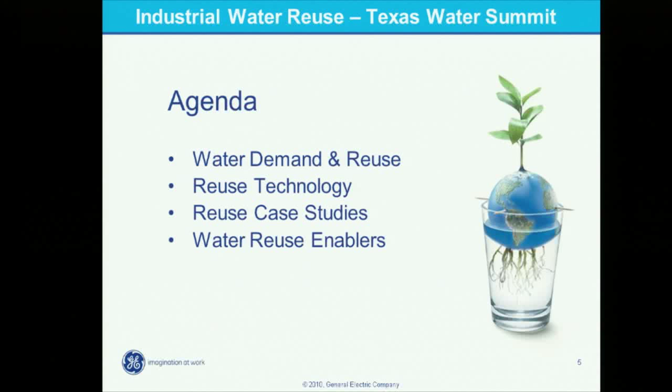So what I want to talk about today - I don't want to cover a lot of ground that's already been presented, but talk to you a little bit about industrial water reuse and what we've seen applied to date, and touch upon what we think the future holds and where some of our R&D dollars are going.

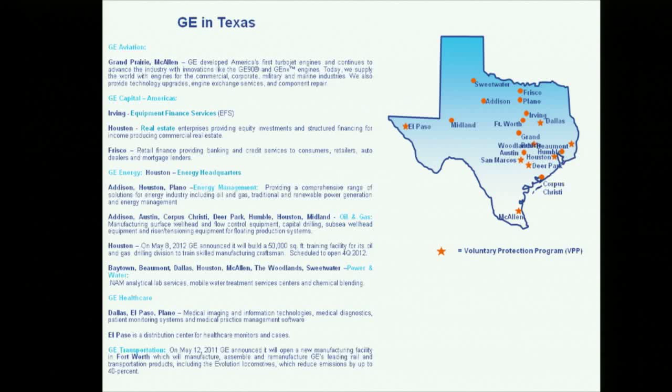Texas, we're here today because Todd and I and others really enjoy the field of water treatment. It allows us to apply fiscal and environmental stewardship in the work we do. We're also here because GE has a big vested interest in the state of Texas with over 9,500 employees, so we want to make this community sustainable for those fellow associates, whether it be healthcare, aviation, GE water, power, oil, and gas, as Dr. Freeman indicated earlier with our investment here. So we are committed to Texas.

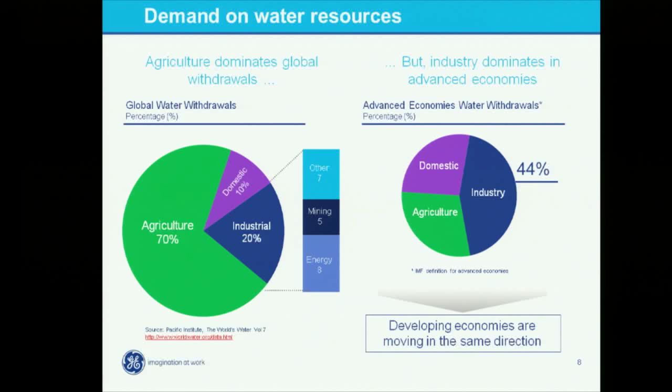In terms of industrial reuse, you've seen similar slides today, but I wanted you to understand that the use of industrial water around the world is nowhere near what it is here in North America, but it's growing. The vast majority of our advanced membrane systems on reuse water are overseas, especially in the oil and gas industry. This is important when we talk later about economics. You've seen this slide before, just a little different variation from the 2012 report.

But what is water reuse? Conventional technology, whether it be clarification, activated sludge, mixed liquor, aeration, treatment for organics, and conventional filtration, media filtration, would discharge directly to your river. But reuse looks to do several things. Number one, use advanced technology to recover some of those valuable resources. For instance, carbon can be an energy source, especially in food processing, where the biological oxygen demand levels are very, very high. You can capture that and produce gas through an anaerobic treatment process.

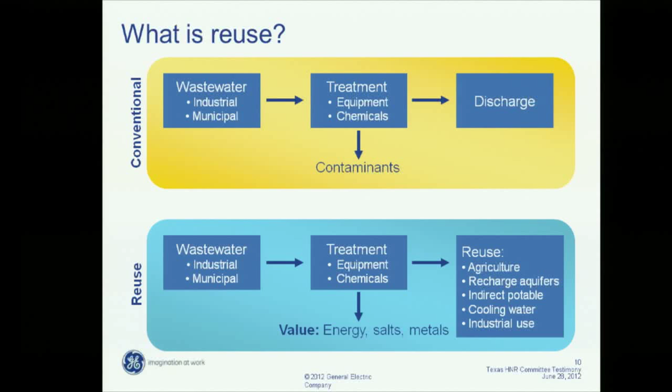As well as inorganic salts - my associate Todd touched on this earlier - can we convert those salts to a usable byproduct? And then reuse options: can you expand the number of reuse options beyond agriculture and recharge? Indirect potable use, and in some parts of the world, they're looking at direct potable reuse with advanced technologies.

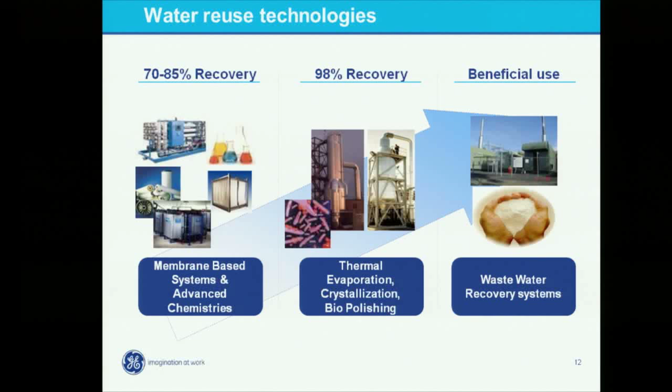So the technology itself - we touched on these topics today - whether it be a membrane-based system or a thermal-based system, just keep in mind that you have a concentrate stream you need to manage, whether it's deep well injection, evaporation pond, or thermal evaporation. But a lot of our research and development is in creating those salts, in creating membranes that are less susceptible to fouling, which includes the management of dissolved inorganics, as well as hot oil produced water that comes back, say, in the oil sands of Alberta. How do you recover that heat and maintain it? Is it with ceramic membranes, or more conventional membranes? And then the cost associated with these different technologies - they could be standalone technologies or a combination of processes.

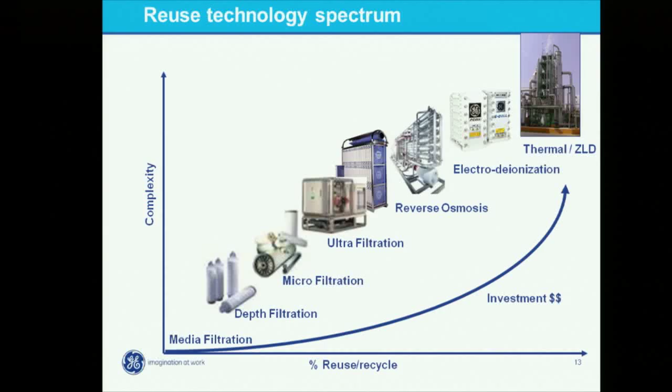Ultrafiltration could be used for direct filtration of surface waters for drinking water purposes. It could be used for tertiary filtration for wastewater, either for direct discharge, especially if you have a low nutrient discharge limit, or if you want to feed it to downstream desalination technologies. If you want to combine that with a membrane bioreactor, or as a membrane bioreactor, you can enhance the organic breakdown of solids and produce a pristine effluent, again for additional feed to downstream processes. Reverse osmosis, electrodeionization, thermal - they're all available technologies, but they come with certain CapEx and OpEx costs, and you have to look at the application to determine if it's justifiable compared to all your other alternatives. But the good news is we have a lot of data now. These advanced membrane systems have been on wastewater of multiple types for 10, 15 years, so we can help calculate CapEx, OpEx costs for comparison purposes to see if it's a viable alternative.

On the left-hand side, you see the more readily usable municipal wastewaters, and many industries use municipal wastewater because of its proximity to the source, its predictability, its availability, and its treatability. The Palo Verde Nuclear Power Plant just signed an extended agreement for municipal wastewater from the city of Phoenix because they wanted to assure an available water source.

I mentioned earlier, risk profiling, right? Can I maintain a sustainable business if I don't have secure water sources? So this is changing the value of water, municipal as well as industrial wastewater, but industrial comes with higher cost, more processes, more complexity, and the need for operator skill.

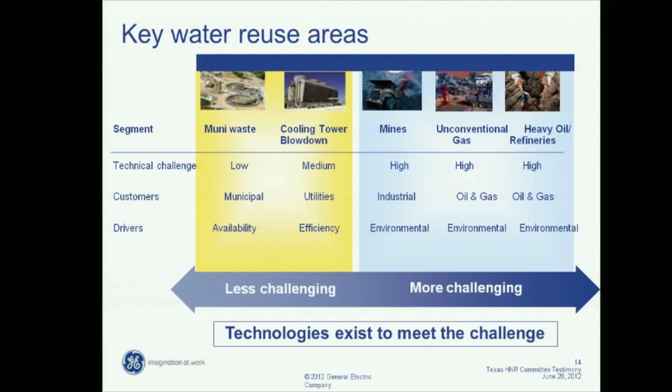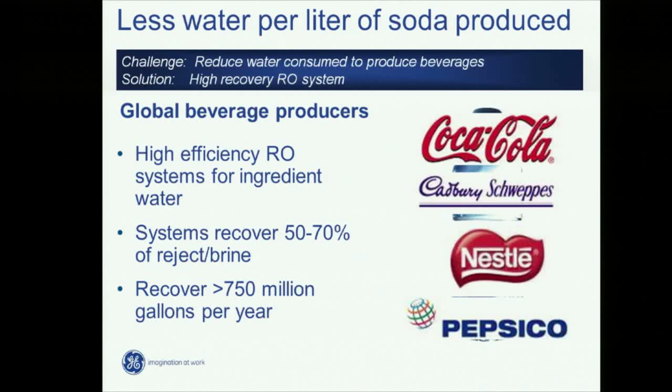Just some examples of cases. One industry leading this is our beverage and soda bottlers, water bottlers, such as Coca-Cola, PepsiCo, Nestle, Schweppes. They're trying to squeeze every ounce of water they can for a given product unit they're delivering.

They look at an entire process stream, RO. They'll put a concentrate RO on the first pass RO concentrate stream, and then take that water and treat it with a membrane bioreactor, feeding it for non-product uses like cooling towers, boilers, wash water, etc., to increase the recovery of their product. This is important as they develop bottling plants throughout the world.

Their approach is to go and look at the watershed, just as we should when planning regional water plants. You've got to look at the entire watershed to make sure you're not creating an adverse impact upstream into the water source as well as downstream in the discharge.

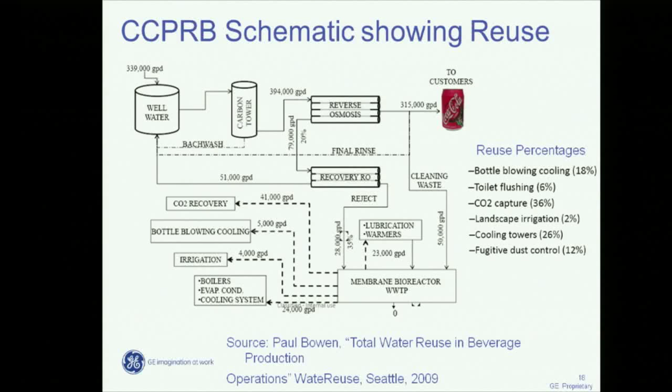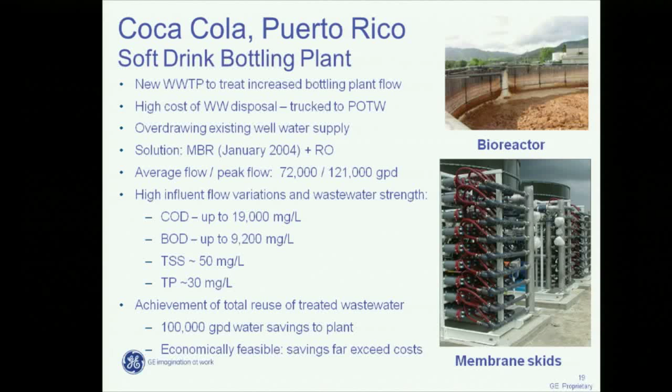They do this on the wastewater side too. This is a Coca-Cola plant in Puerto Rico. Notice the COD content, the biological content that can be converted to a renewable energy source and fired in a boiler or gas engine. And to give equal time, PepsiCo's Frito-Lay plant in Casa Grande is recovering over 80% of the water.

Oil and gas upstream, we touched on this earlier. Several speakers addressed this, but there are systems operating with NPDES permits to the upper Colorado River, and they've discharged over 5 million barrels since they started operation in 2006, again using multiple technologies to do that.

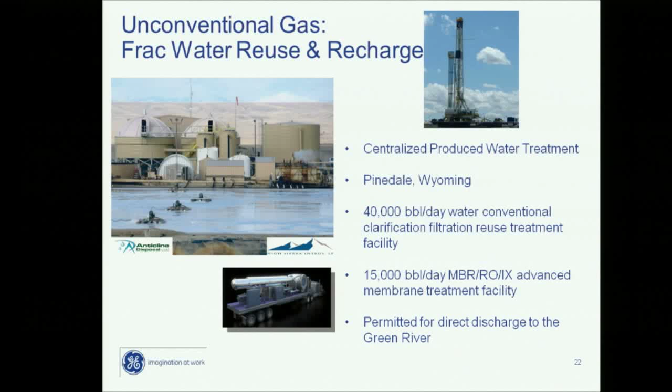The same in Alberta. We have over 30 thermal evaporators now treating produced water and heavy oil recovery on SAGD, which stands for steam-assisted gravity drainage. It's become the preferred method of managing water and getting it permitted rather quickly.

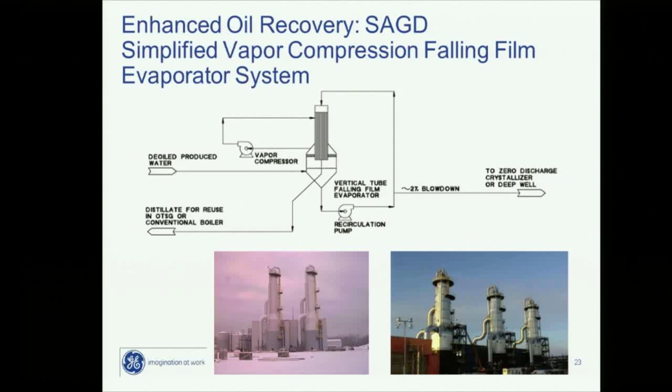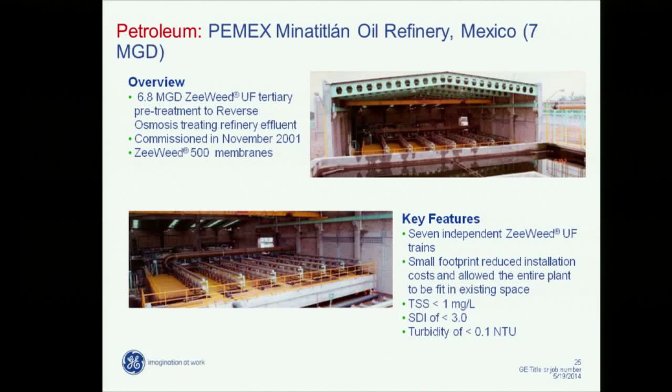Downstream, we have several dozen plants now around the world. This is the oldest, going back to late 2001 — 6.8 MGD of UF tertiary treatment followed by RO. This follows a biological treatment process, which is very typical

in a refinery, especially here in North America in the state of Texas, where they treat the water with RO and recycle back several million gallons a day. And when you're in a situation like Mexico City, paying $6.50 to $7 per 1,000 gallons, this becomes a viable alternative.

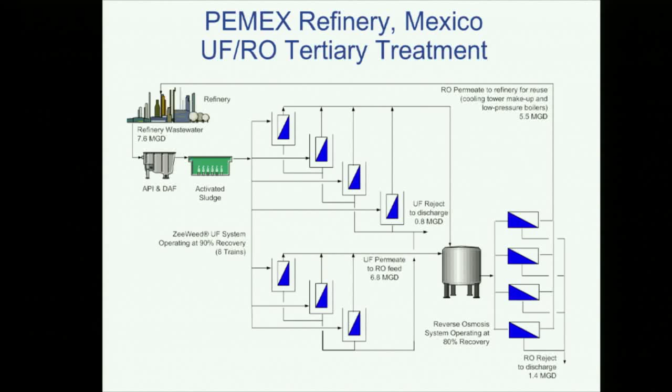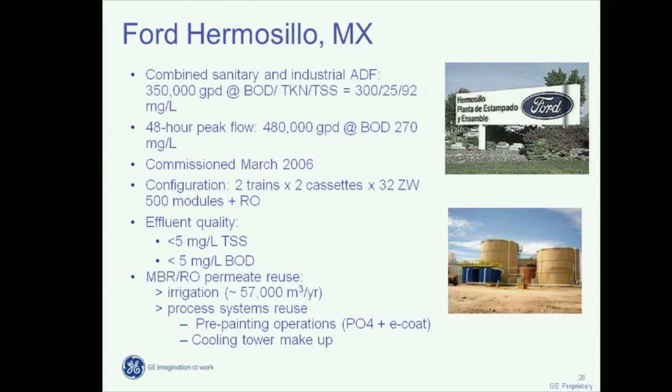Automotive — several automobile plants as well, with highly oily content waste as well as high organics that could be recovered. Semiconductor — the facility in Singapore.

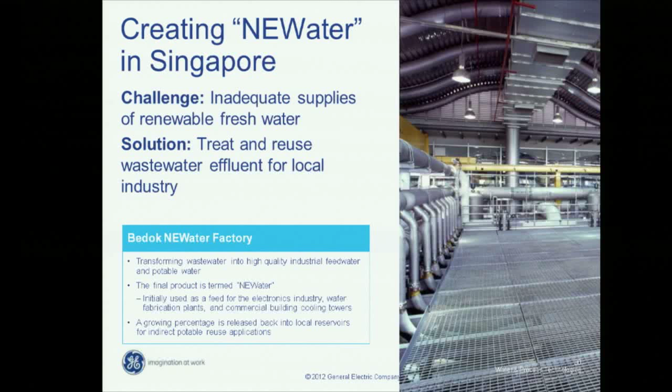Singapore does a lot of seawater desalination rather than barging water in from Malaysia, and they recycle their water using UF-RO advanced oxidation for semiconductor makeup water, and for indirect potable reuse as well. So the technology is available to do this.

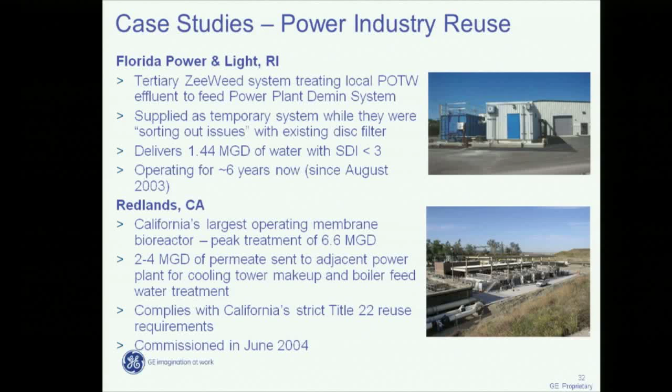And then power — there are several cases of municipal reuse, not only across North America but here in the state of Texas. There are some challenges, and there's an ASME WEF committee looking at reuse in utilities. If anyone's interested in what that committee is about, let me know — I'd be happy to talk to you at the reception later.

And then irrigation — I'd be remiss if I didn't tell you that two of my favorite agriculture projects involve vineyards and golf courses. This is in the lower Napa Valley, and even though a lot of water falls in Northern California, they still have a need for reuse.

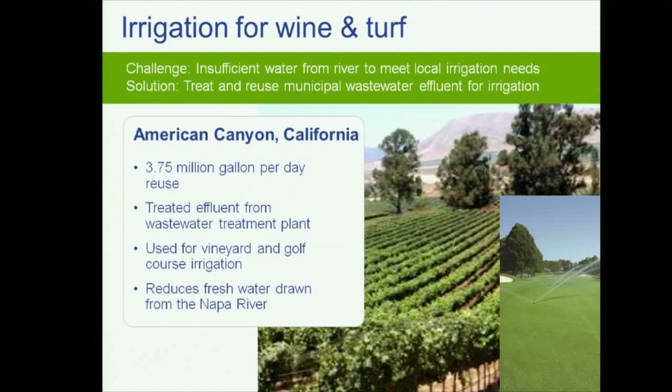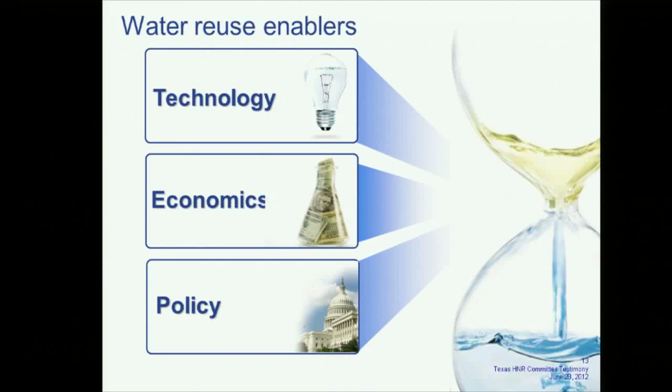So in terms of technology, I think we've touched on that today. We try to minimize the fouling of pretreatment technologies that go to downstream desalination, improve the energy demand of some treatment processes with ultra-low pressure RO membranes, and reduce the energy it takes to break down organics. We're now looking at anaerobic MBR treatment to minimize the power required to break down organics compared to a typical aeration process.

And then policy — you touched on it all today, and I was very grateful for that, especially looking at each water basin and all the stakeholders in it, and considering everyone in the equation. So I applaud the speakers today that addressed that.